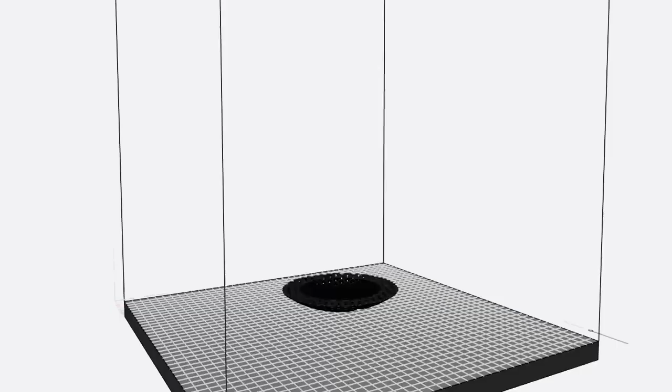The engineers started working together with industrial design. Bringing those two together, we were able to come up with several designs that we then later iterated on, that resembled a basketball, felt like a basketball, but also performed like a basketball.

And the most important part of the formula is the player, right? Because if the player doesn't love it, then it's not going to be a product or a prototype.

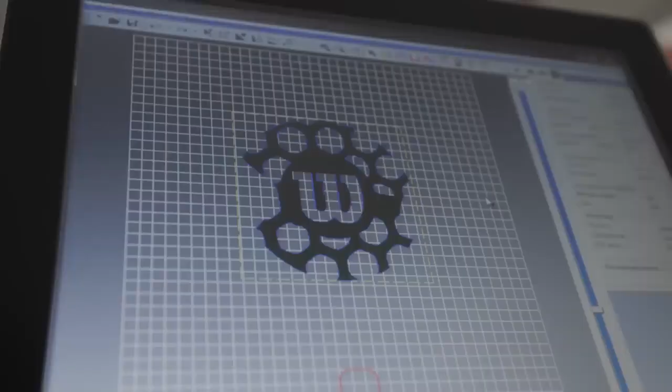We met with General Lattice. We made our design with them, and it was translated to a digital file that can be read very easily by the printer. We sent that file to EOS.

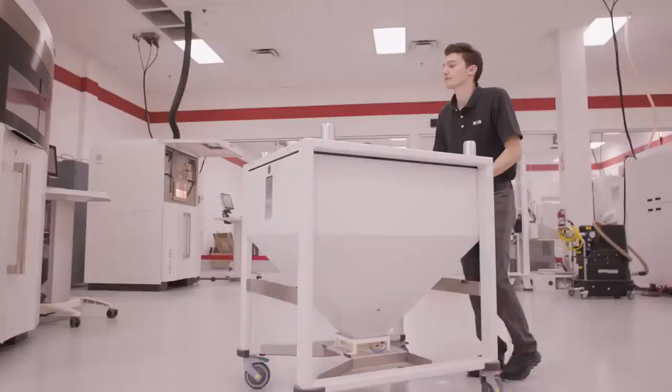Working with a brand like Wilson is a little bit different for EOS because we are traditionally working with aerospace companies, automotive companies, medical device companies.

Additive manufacturing was the right choice for the airless prototype because first off, it's literally the only technology on Earth that could bring this concept to life.

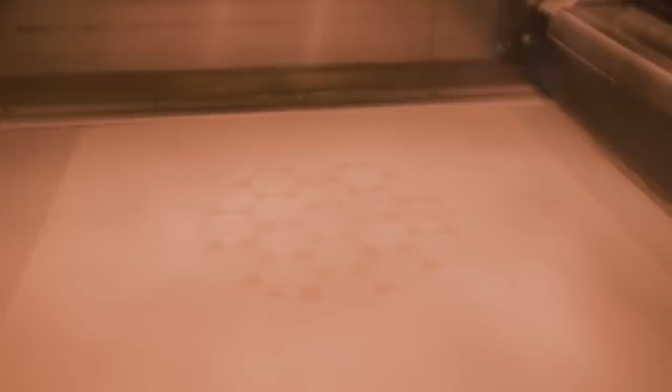So what happens is there's a powder bed that's swept across, and then a laser almost etch-a-sketches a pattern in 2 dimensions. And as this process iterates over and over, you end up with a 3-dimensional ball.

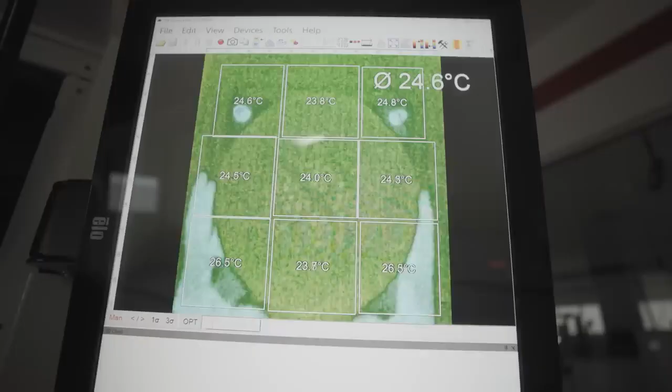Removing that powder from the ball without damaging the ball is kind of like an archaeological dig. At that point, the powder is sealed using a smoothing technique, and then dye is penetrated and reacted with the polymeric surface. After that process was complete, we would send the ball to our NBA test facility in Ada, Ohio,

where they would put the ball through rigorous testing.

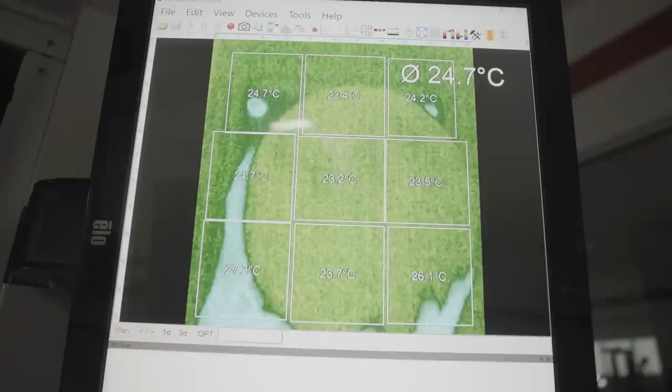This is only a dot on the development path, but we're really excited about the first step that we have here. I mean, that's our goal, that's our job, is to push boundaries, change perceptions of the brand.

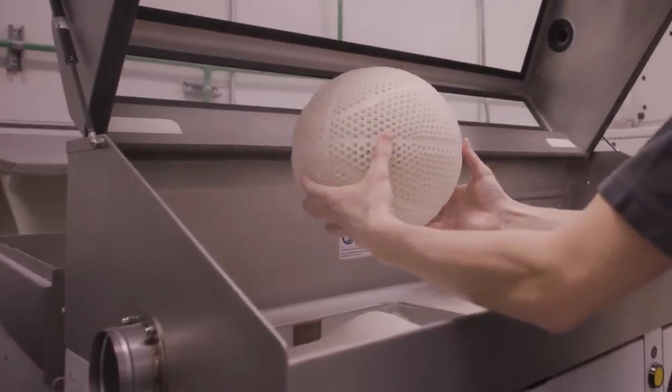This is what we call the one. Basically, let's make one and let people enjoy it and understand where we need to move forward in the future.